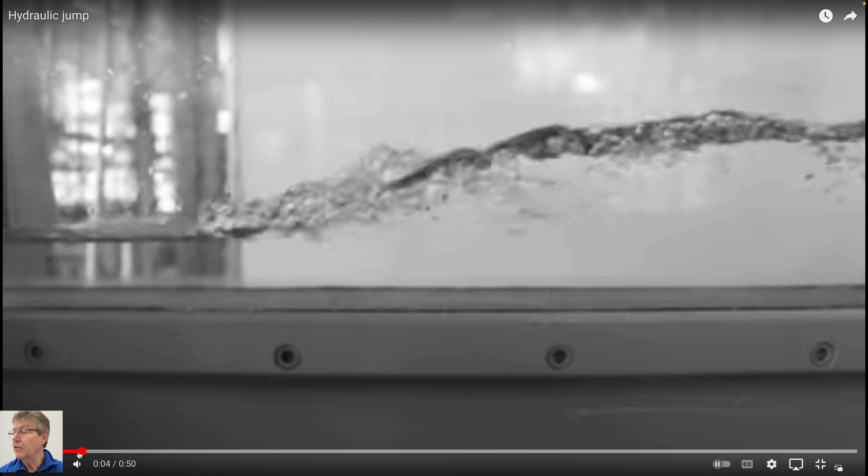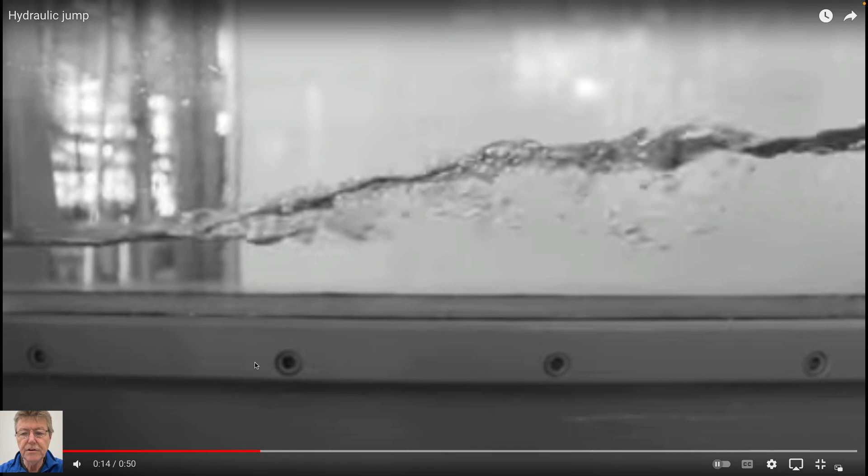You could imagine this is an elevated flow upstream, left of this plume. The interesting thing is it's not a confined flow within a pipe, so it can rearrange its cross-section to be either a fast, very shallow flow on the left-hand side, or a slower, deeper flow on the right-hand side, because a section across it anywhere has to have the same volumetric flow rate. This free surface allows it to rearrange itself in some way, and that's the essence of open channel flows.

The interesting thing about these, as we've made this point before, is if you're surfing in West Virginia, as they would say, many of the things we've talked about relate to balancing gravity with forces. For hailstones falling in thunderclouds, drag on the hailstone is balanced against gravity, which is the motive pulling it down.

It's not so different here in surfing West Virginia. Gravity is driving you down the face of the wave, but the water's flowing past you and providing some kind of friction on the bottom of the boat, perhaps viscous forces. It would be the same as snowboarding downhill, using gravity to go downhill, with friction acting against the base of your snowboard and air resistance against your body. So that's what we're dealing with, balancing those forces.

More interesting, I think, are some of these: the New River, not very far from here in West Virginia, big rivers in West Virginia, probably four hours' drive from here - the New River and the Gauley. It was interesting to see what people can do on these waves.

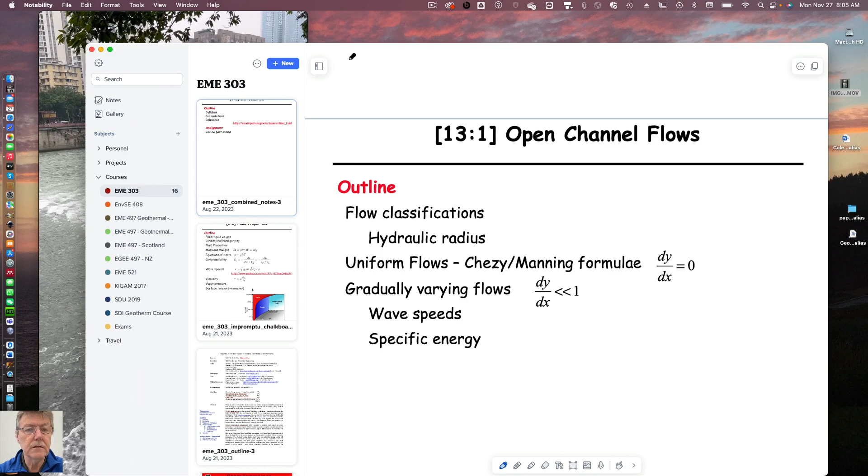So that goes. So I guess I can do that. So let me get this going. So that's our plan for today. I guess I was so excited I didn't turn my pad on.

So I thought that maybe we would recap some of the things we've talked about in the last couple of weeks and put everything in the same format. We'll talk about these classifications for flow, for open channel flows, where we have a free surface, and we'll find that they can be uniform flows, gradually varying flows, or rapidly varying flows. That's what that classification is.

We can define things in terms of hydraulic radius. We know that when we talked about Reynolds numbers, we talked about a characteristic length, which was a diameter.

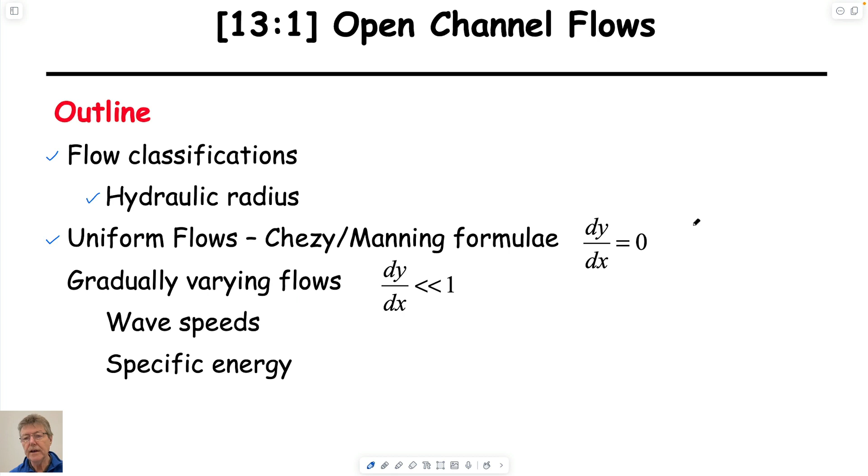We already defined the equivalent hydraulic diameter for non-circular section pipe flows. And probably today we'll finish talking about uniform flows, which is a simple demarcation to say that the depth of flow as you go from upstream to downstream doesn't change. Y is the depth of the flow, and we can accommodate that. So those are the things we'll talk about today.

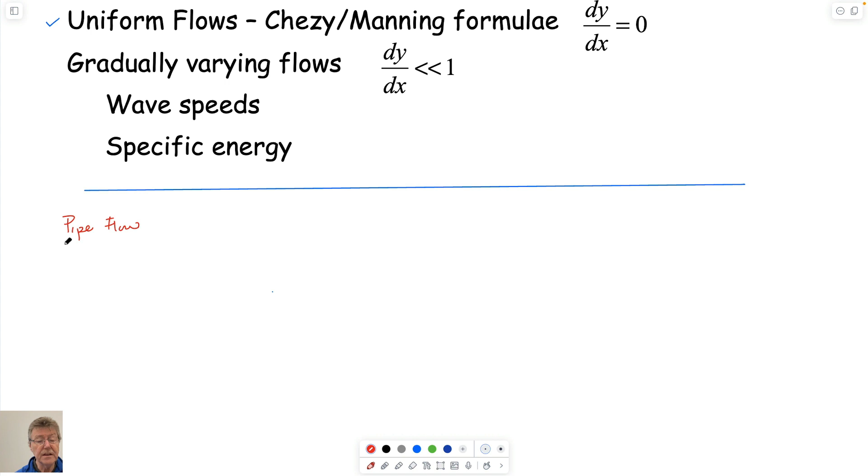But before we do that, let's recap where we are with all of this, in a nicer color. We talked about a bunch of flows. I think you've seen this before, but it cements the ideas of what we might talk about.

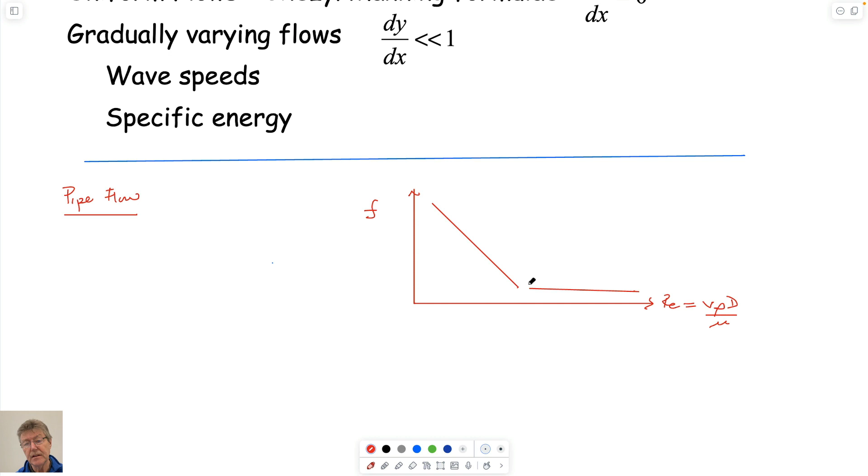In pipe flow, we talked about the Moody diagram, where we had Reynolds number, which involves velocity, density, a characteristic length, and viscosity. And we had what we called a friction factor. The characteristic behavior we saw looked something like what you messed around with.

I'll do this because it saves us time as we draw multiple diagrams on top of each other, which start looking the same, and which we will continue when we talk today. Again, Reynolds number - this was something like coefficient of drag. This was laminar flow, for circular pipes. The flow is internal, and it has some average velocity as you're going downstream.

If we write out Bernoulli and look at the terms that don't disappear for flow down a pipe, upstream to downstream, if the cross-sectional areas don't change, then the upstream and downstream velocities don't change. If it's a horizontal pipe, the elevation doesn't change. Then the pump losses equal the sum of the head losses in the system. Head losses we can define in a couple of different ways in terms of friction factor, length over diameter, and v squared over 2g.

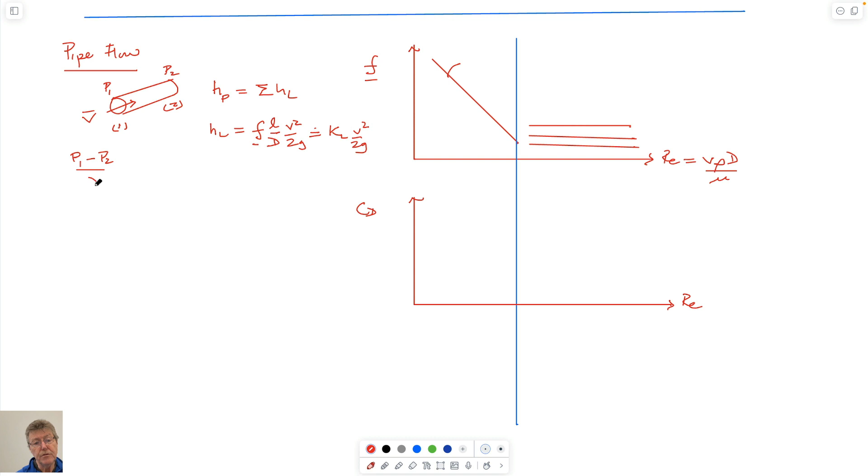Or equivalently, some kind of loss coefficient times v squared over 2g. Highlighting this because this is the case. If we look at the pressure upstream and downstream, we can write this as P1 minus P2, which is delta P divided by unit weight. If we don't have a pump in the system, it's just equal to the sum of head losses, which equals friction factor times length over diameter times v squared over 2g.

We've also talked about, in terms of dimensional analysis, geometric similitude - I can never remember whether the second one is dynamic or kinematic, I think it's kinematic. So this is geometry of the model equals geometry of the prototype, and this is Reynolds number of the model equals Reynolds number of the prototype. It's easier to draw on the open channel flow figure - that means if you look at the flow field...

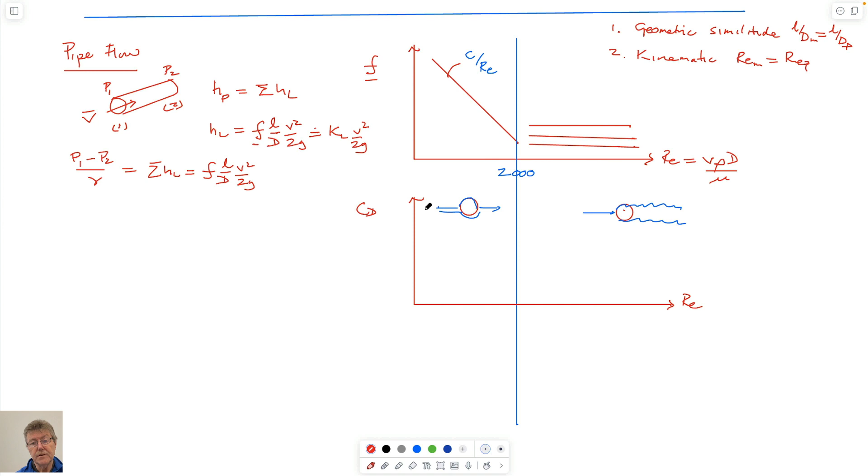Then laminar flow is this creeping flow - not that creeping - as opposed to being this. This is around 2000, something like that. This is some coefficient over Reynolds number, typically 64 for circular pipe. And if we're doing this, we have something like this - this is turbulent, and this is laminar.

Because this is a function of Reynolds number, we know flows on this side have CD or F proportional to 1 over viscosity - actually proportional to viscosity, isn't it, because it's 1 over Reynolds number, and Reynolds number is 1 over viscosity. So this is proportional to viscosity. And here, friction factor or the equivalent coefficient of drag are proportional to density. I suppose if there is such a symbol - not proportional to viscosity and not proportional to density. So the two regimes offer different kinds of behaviors.

We know this is also a function of increasing roughness, so epsilon over equivalent hydraulic diameter - this is a big roughness, and this is a small roughness. This means that when we use these to calculate things like velocities of flow, we end up with direct proportionality here and a v-squared proportionality here that we solve for. It happens in both cases, and we solve the equations slightly differently by balancing the pressure that's driving flow, in this case from upstream to downstream.

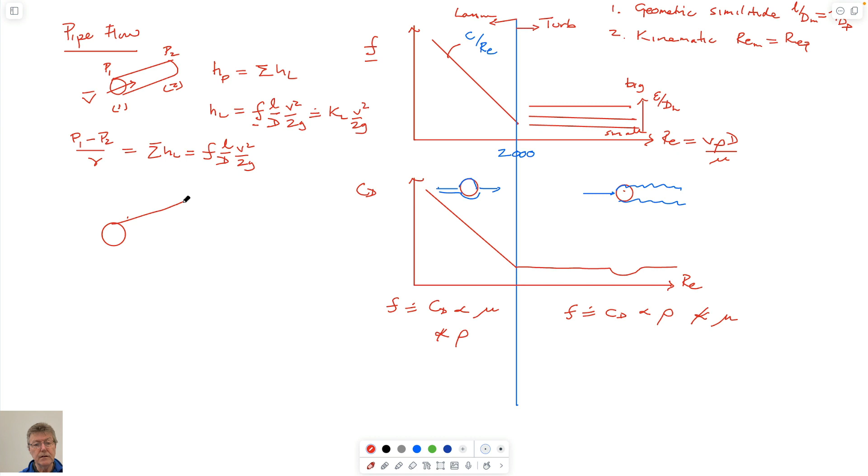I guess the analog in this system would be - we've drawn this before - that the flow that occurs goes around this.

And I don't need to perhaps belabor the point about that. So this is pressure upstream, pressure downstream, etc. And so what did we get? We got that coefficient of drag is equal to some drag force divided by half times rho times velocity squared times characteristic dimension squared, an area. And so this happens to be the frontal area. This happens to be the force that we have to apply to resist it.

And if we know what the value of D is, again, this is coefficient of drag divided by Reynolds number. I think 22, or is it 24? 24, I guess, for a sphere. And in this regime, it's proportional to viscosity. In this regime, it's proportional to density.

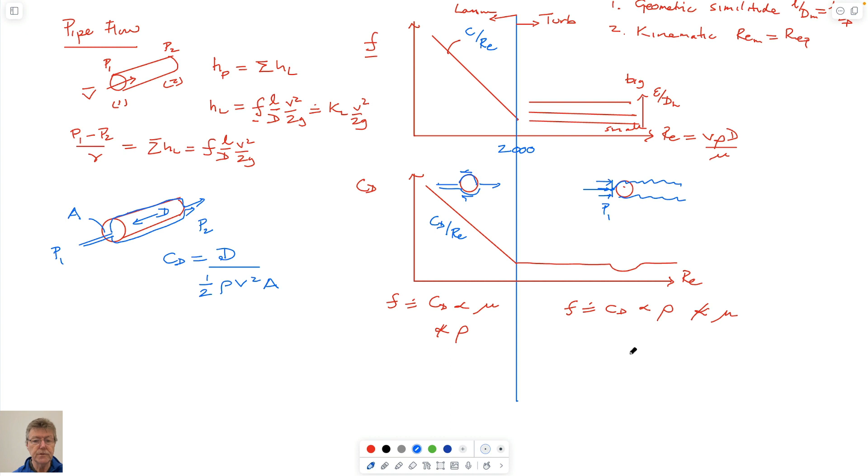And we explain that by the fact that it's not the drag that, so this is the shear force that goes around here, which is causing this drag in this particular case. And this is the frontal pressure that's applied here, that is the stagnation, so the pressure one is the stagnation pressure that develops here, which is why it's proportional to density rather than viscosity. So that's kind of where we are so far.

And so the next thing to chat about is open channel flows. And so not surprisingly, because I've done this, the figures turned out to be kind of the same. But we don't reference them the same way because we have the same behavior as before.

The characteristic that defines the drag is called the Manning coefficient, which is lowercase n. And the behavior would be similar.

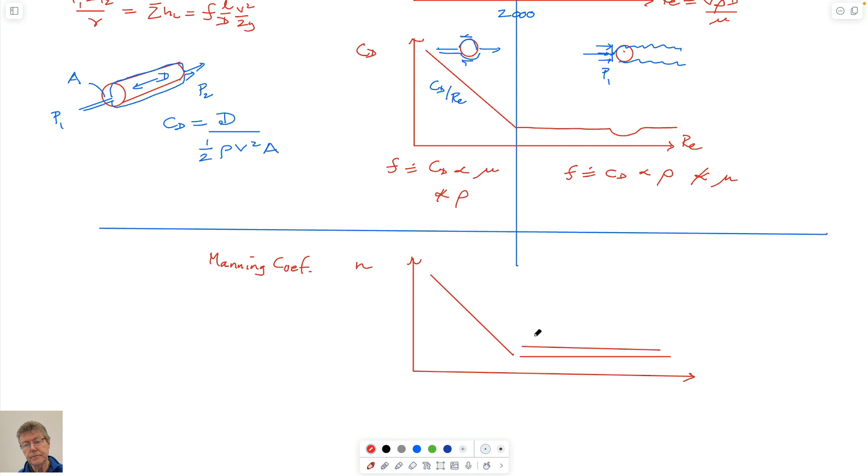So this is values of, if you like, channel roughness. So if you have a smooth channel, if you have a channel made of glass versus a channel made of concrete versus a channel made of weeds, then this would be rough and this would be smooth. And so this would be values of Manning coefficient, which go from small to large.

And as a continuation of this, this happens to be a Reynolds number, which is also defined in terms of a velocity, a density, and a hydraulic radius, and viscosity. And what we'll find is that this regime really doesn't exist for open channel flows because they're all turbulent.

And this is because of the fact that hydraulic radius and hydraulic diameter are related as 4 to 1, not 2 to 1. This ends up being a Reynolds number of 500. And the region which we always find ourselves is always this turbulent regime. So that's kind of where we're going with this.

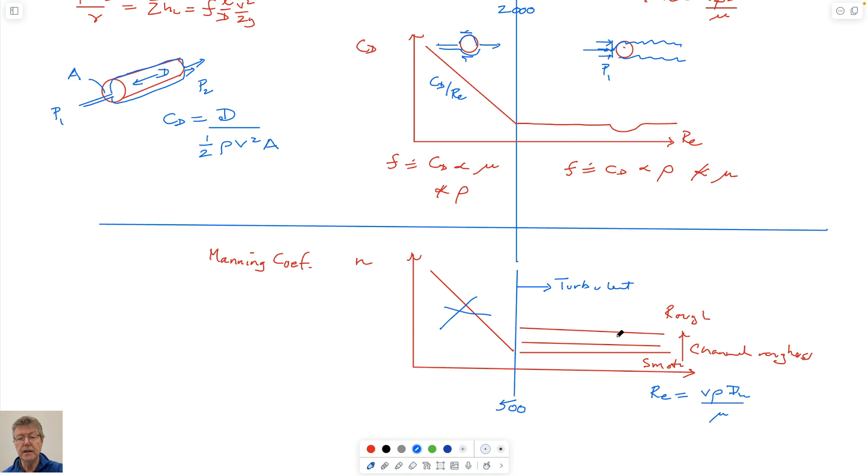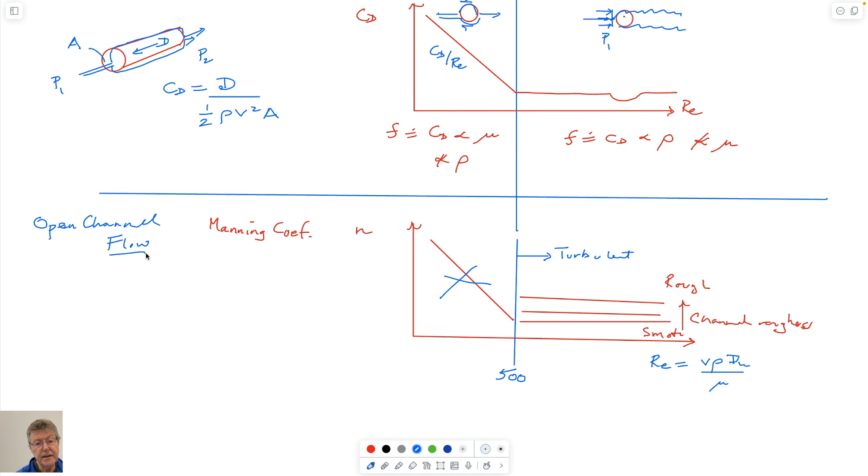versus flowing down a weedy channel, which is just the banks of a river in full spate, which is overbank, then we just change the value of this coefficient. But as we increase Reynolds number, it doesn't make any difference to where we're going. So that's kind of where we're going with this. So this is open channel flows. And as I say, perhaps of less relevance to your disciplines than the other two, but nonetheless important.

So a few orchestrated words, I guess, trying to make the point here. So this is exactly what we're talking about. So you could think about flow within a pipe, but it would be open channel flow if it wasn't completely filling the section. Because the one thing that we have that's a free parameter is the depth of flow.

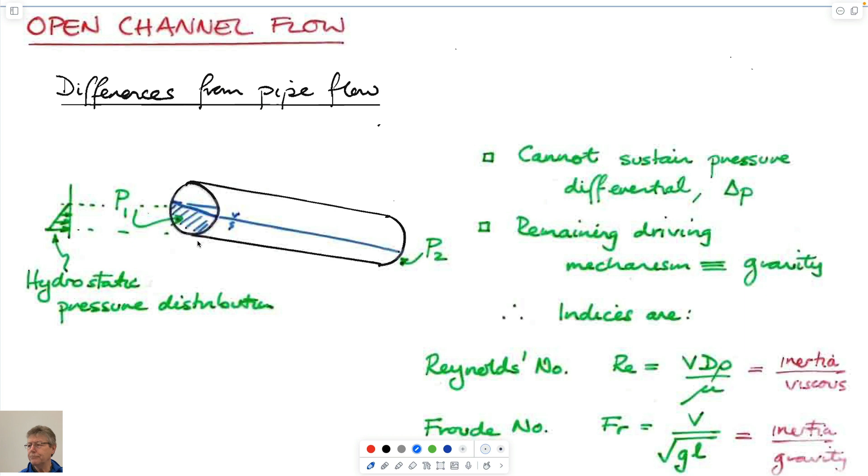We can't absolutely drive flow with pressure in this case, as perhaps you can see here. If you have an upstream pressure and a downstream pressure, it'll just tend to flow in the air above it because it's much less viscous, much more efficient, and you wouldn't be able to maintain the pressure differential by flowing the fluid. And so the fact that it only partly fills the section, even though it's in a pipe, means that it's an open channel flow rather than a pipe flow.

If you looked at the distribution of pressure below the surface, no surprise, when we looked at Bernoulli, you'd see that the pressure difference is just a linear one, just like going down in a static swimming pool.

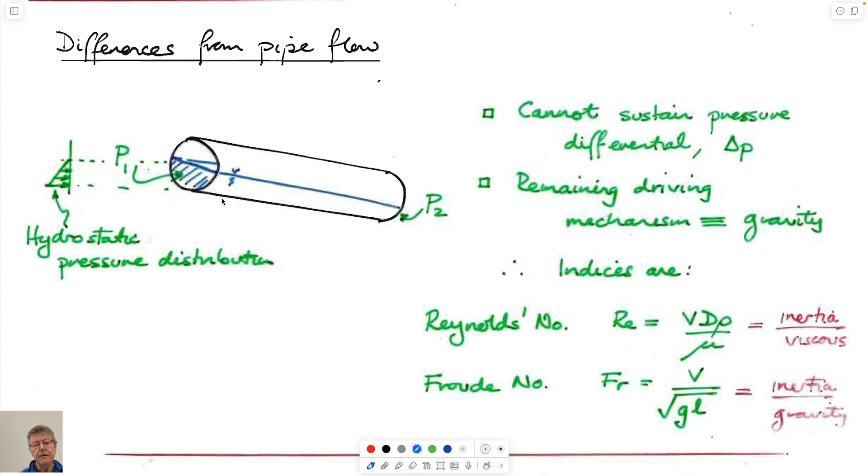I guess if it was going around a curve, it would have some different format to it, as we know from looking at Bernoulli and centrifugal flows, and going over a hump in a car, with the analog we talked about having water in a beaker. But if it's flowing and the section isn't changing, it would just be hydrostatic as it goes downstream.

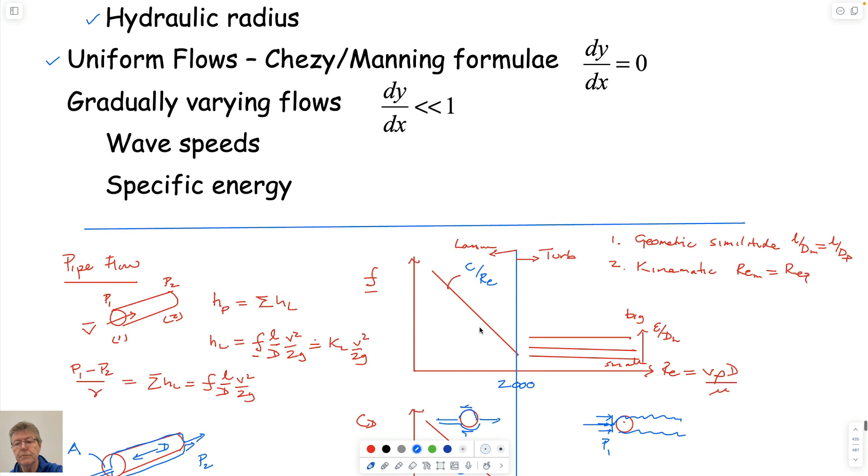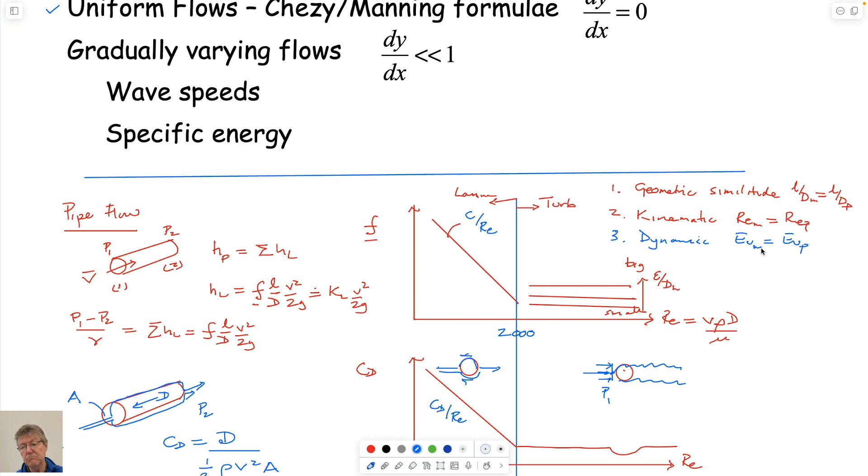If we want to have similitude, and I guess I didn't finish my thought before, the third would be dynamic similitude, and that is that the Euler numbers are equivalent between the prototype and the model. So those are the three things that also conform if we're looking at open channel flow.

I just didn't finish that thought. So we want to make sure that we're at the same Reynolds number. We say it doesn't matter so much because we're almost always turbulent. We haven't proved that yet, but we will in a moment.

The other thing that's important to us, which we haven't revisited since maybe our second class, is that we can look at the velocity of the celerity wave. The celerity wave is just the square root of gravity times the depth of flow. This is the rate at which a ripple travels, or a tsunami travels across an ocean basin, or a ripple comes from throwing a stone in a lake. It travels at this particular velocity.

And if the flow within the river is given by this term here, then when this number is equal to 1, the flow is traveling exactly at the velocity of the celerity wave. And that has implications for the regime, because if you think about it...

There's some information that you can imagine having to be transmitted from downstream. So we saw this hydraulic jump where we go from a shallow flow at high velocity to a less fast flow at a deeper velocity. How does it know what's going on downstream? Well, it can send information upstream, and that information will travel at the velocity of the celerity wave.

Something that's done quite often, or used to be—perhaps there are more sophisticated ways now—is in drilling. If you want to send information from monitoring behavior at the drill bit, you can send it as pressure pulses in the mud up to the surface. And of course that travels at the speed of sound in mud, not the celerity wave. But it's a way of being able to get information about what's going on at the bit, how hot the bit is, how much torque is being applied at the bit, and to get that up to the drill deck to inform what's going on.

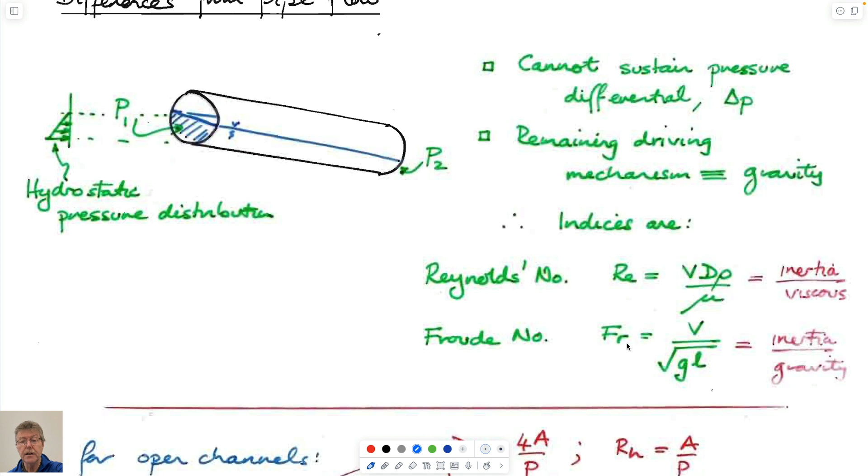So you could think of that as being a similar way of sending information by tapping it out on the surface of the water, almost like drums, sending information by drums.

We happen to define Reynolds number in terms of the diameter. And if we define the diameter in terms of the relationship between hydraulic radius and hydraulic diameter—I don't know quite why this is, but it is—then it's done as the hydraulic diameter is 4 times the hydraulic radius, which means that if you measure Reynolds number in terms of the hydraulic radius rather than diameter that I put up here...

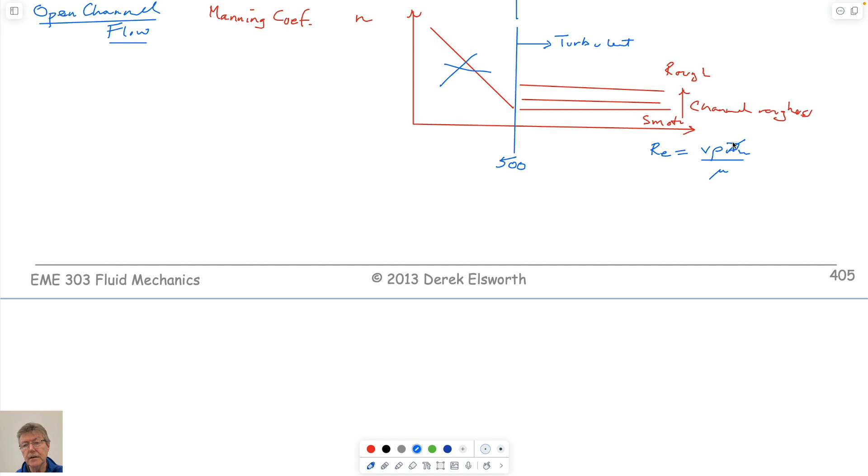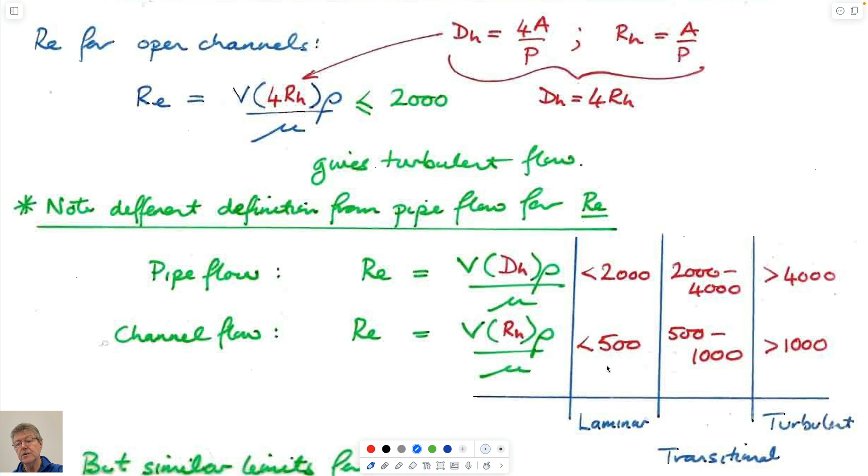So maybe this is hydraulic radius. Then the fact that this ends up being a 4, 2,000 divided by 4 is 500. And so if you look at open channel flows, this demarcation between laminar and turbulent occurs at this mark here. So that's the reason for that slightly different threshold.

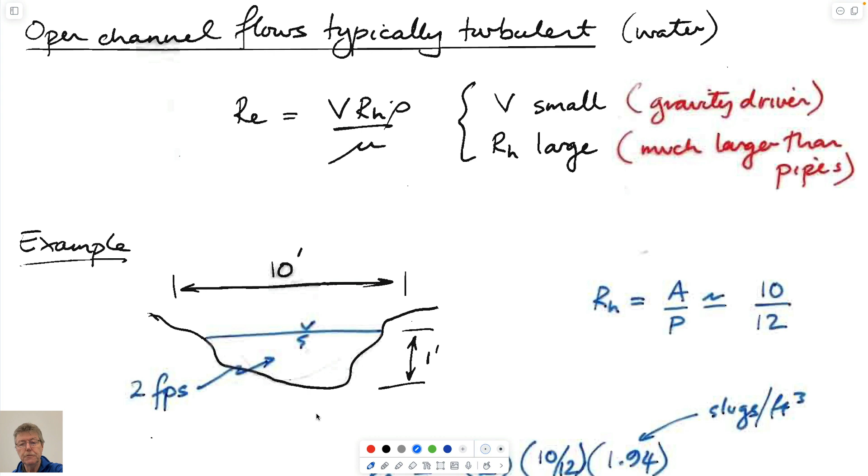But we're always to the right of that and don't have to worry about it. And you can prove it to yourself just by looking at whether we are above that threshold for any reasonable river. So if you take some numbers for a channel which is 10 feet wide, 2 feet a second, 1 foot deep—it's actually a ditch really, isn't it? A foot, it'd be barely up to your kneecaps if you're standing in that.

And you look at the Reynolds number for that as being equal to—the hydraulic radius is 10 over 12. So the hydraulic radius is equal to the area, which is 10 times 1, divided by the perimeter, wetted perimeter, which is 1 foot by 10 feet by 1 foot. So this is 10 feet, 1 foot, and 1 foot, which is this.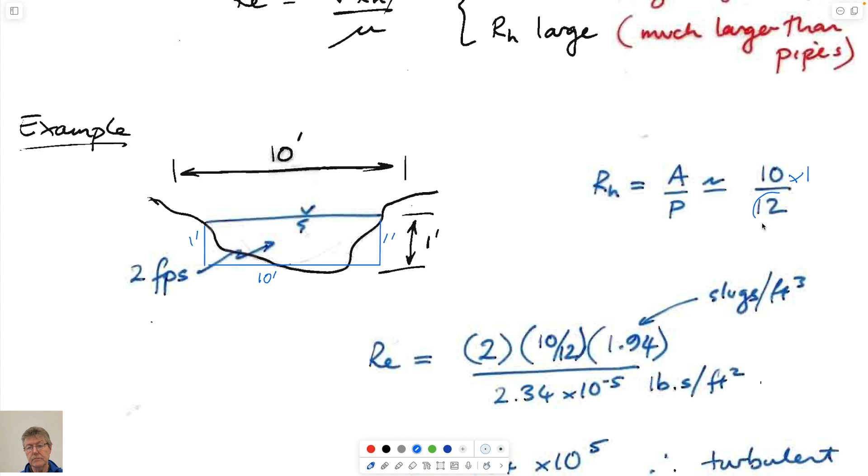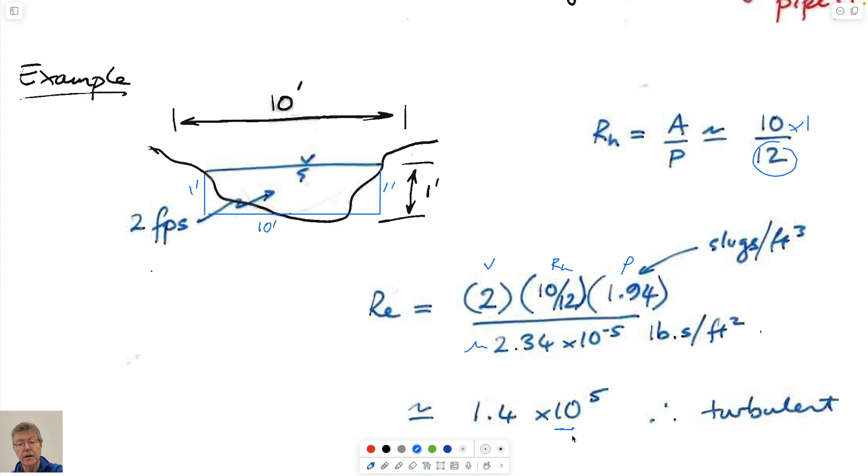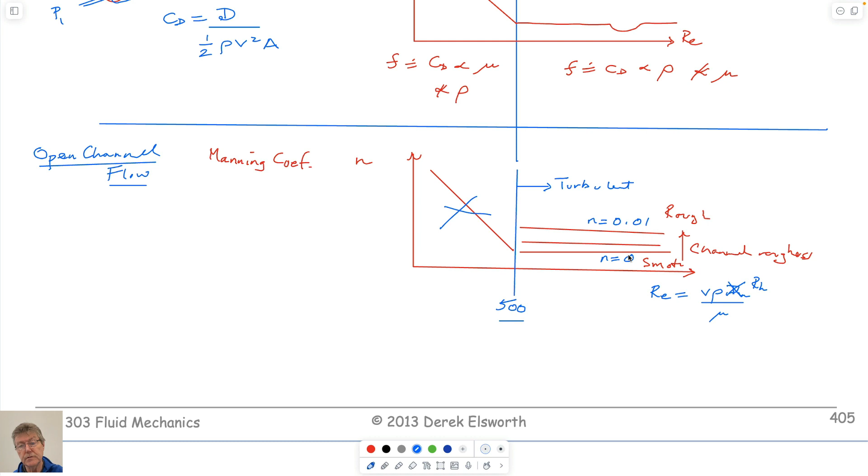So, classification. We said we'd classify things. These terms here refer to uniform flows, gradually varying flows, and rapidly varying flows. And I guess each of those, as I stated them, are in order of increasing deviation from being a uniform flow.

So a uniform flow is that as you're upstream, the depth of flow here compared to the depth of flow downstream doesn't change as it goes from upstream to downstream. Gradually varying flow means that it's slightly different, maybe deeper upstream than downstream. And a rapidly varying flow means that there's a big change between it going from upstream to downstream.

So that's the most uniform is the uniform flow. The next up from that is gradually changing, and then rapidly changing is more extreme as you go. And so by definition of that, if you state it mathematically, the change in depth as you go downstream in the x direction is that the depth doesn't change. Written mathematically, that's just what that is.

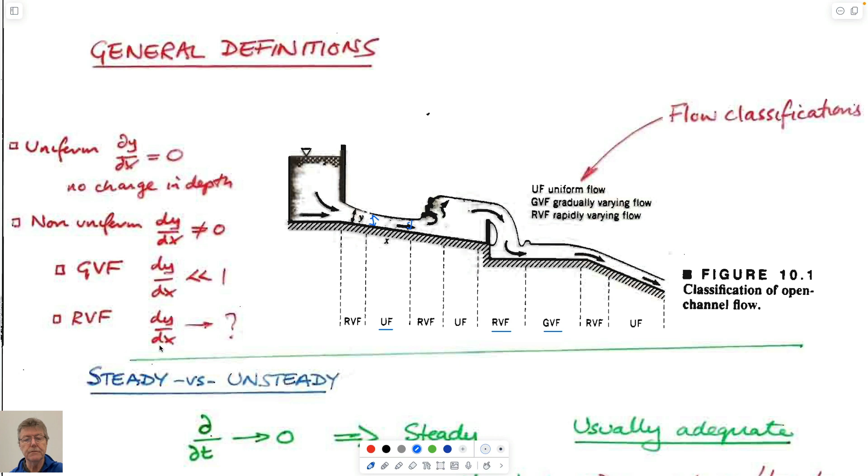A gradually varying flow, it's much less than 1, and a rapidly varying flow, it's different. So anyway, we'll deal with those in due course.

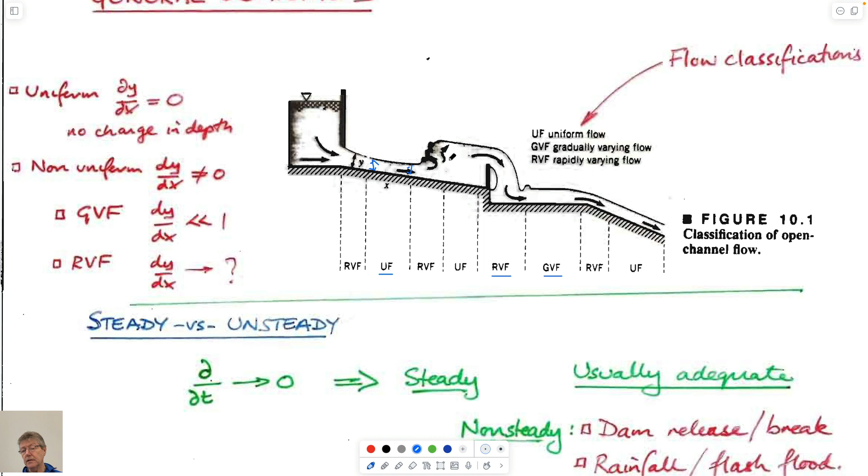Steady versus unsteady, we'll only deal with steady flows in our case. So each of these are steady flows. If you take a snapshot now, come back to this picture, take a snapshot 10 minutes later, this would be exactly the same profile with the same velocity distribution as you go downstream. It isn't the same as you travel along in a boat, as you see this, but it is for a static observer. So we're always looking at no change with time.

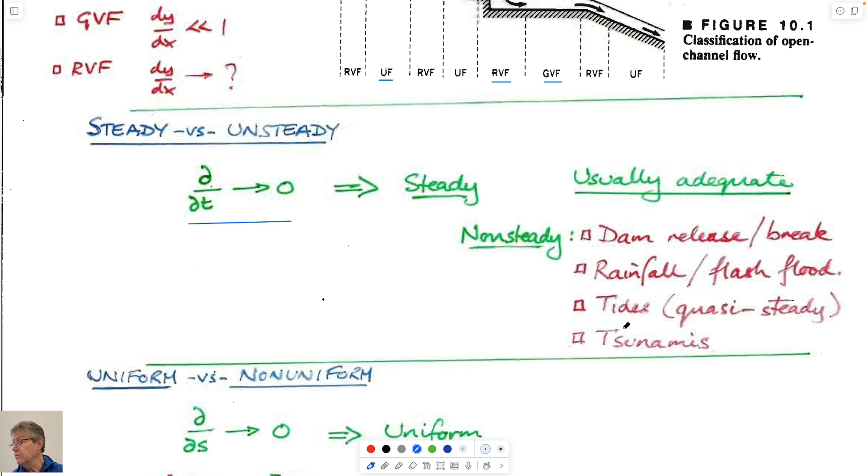And so examples of non-steady things: if you have a dam break on you, changing rainfall as a hydrograph, tidal bores in rivers would be different from that, and of course tsunamis are a transitory wave as well.

So what we'll do is we'll deal with uniform flows today, and we'll talk about gradually varying flows tomorrow, Wednesday. And so the definition of this and the difference between them is given by these.

The only motivation for flow is given by gravity. So it's the orientation or the inclination of the bed which provides that gravity. The slope of the bed is given by the change in z as a function of x. So in other words, I guess this would be this. I think we use L, but we can use this as well. So this is the motivation for flow.

And for uniform flow, what we would presume is that since the upstream depth and the downstream depth, you could think of them being perpendicular to this bed, or you could think of them being vertical, the fact is that this inclination is so shallow that both of them are basically the same. You don't have to worry about whether it's normal to the bed or not. But if the depth upstream and downstream are the same, then the slope of this surface, of the water surface, has to be the same as this.

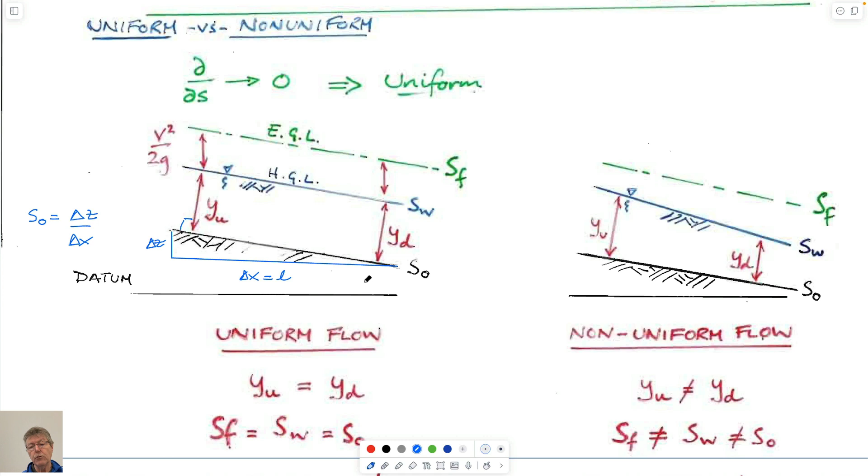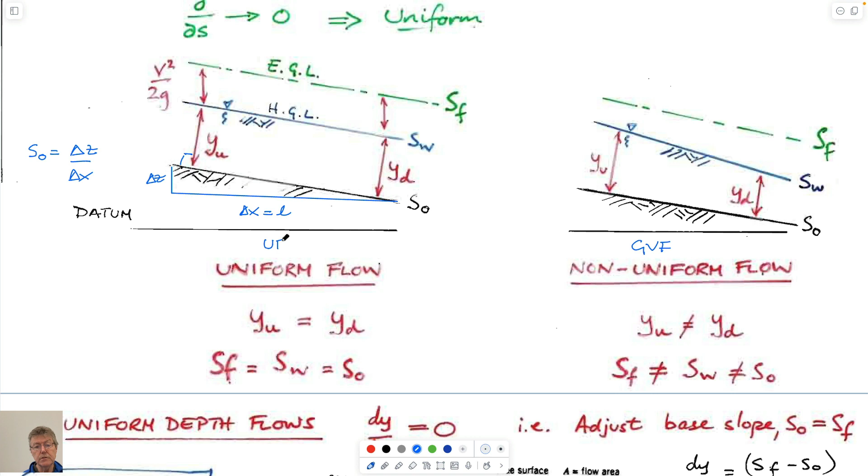If we look at non-uniform flows, which would be gradually varying flows, and these would be uniform flows, then you can see that we violate that. There's no requirement that the depth stays the same as you go downstream. And so there's no requirement that the slope of the water surface is the same as the bed slope.

So these hold that for the slopes of the water surface, the energy, and the bed have to be the same. Not so for gradually varying flows.

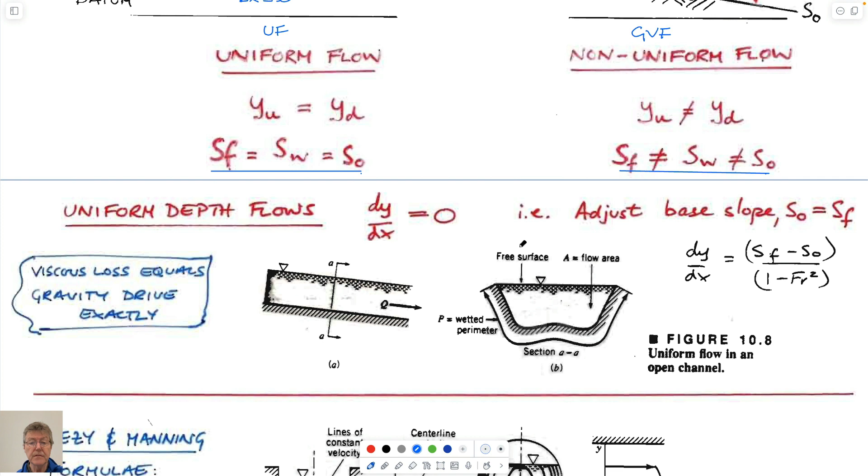I guess the other thing that we will assume is that there's no viscous loss, or the viscous loss is countered by the gravity drive. So the amount of potential energy we lose as we go downstream is exactly countered by the upstream. You could think of it as a viscous force, though it's not really a viscous force acting upstream, which exactly counters the change in potential as you go from this point here to a lower elevation here.

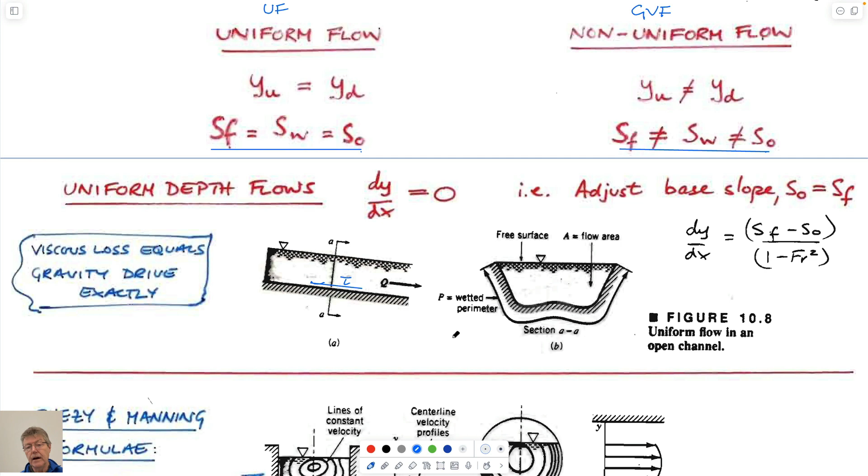And this is applied on the perimeter of the flow. The other thing we can think of is the cross-section of flow, if we draw this in perspective. So we have a perimeter which would look like this, and this length is the perimeter. So this is the area of flow, with a free surface on here.

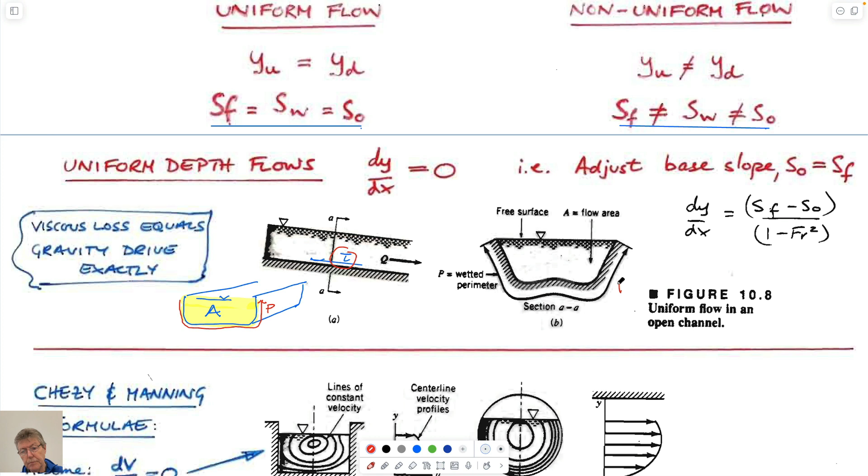And along this perimeter, this shear stress is applied, and it resists this flow. This shear stress is applied all the way across this perimeter, and so the wetted perimeter is what is important to us, shown by this contour here. This is the same as our P, and the A is within here.

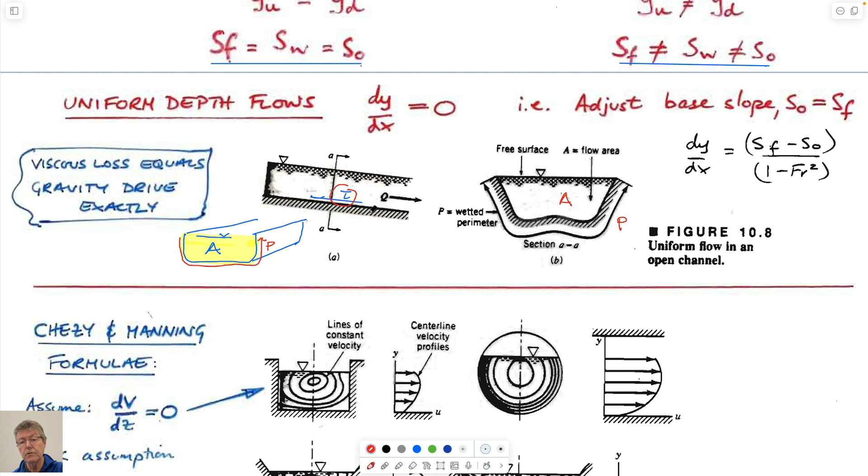And we also make some assumptions about this behavior - don't worry about this equation for now. So the balance between shear stress and gravity is what controls the rate at which it will flow downstream. A bit like the balance between drag on a skydiver and gravity, the person's weight pulling them downward.

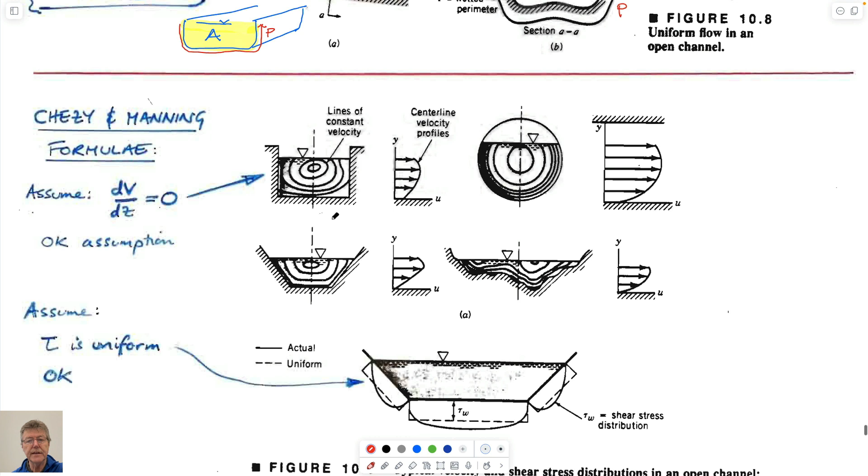The other assumption that we'll make is that the flow across the section is kind of uniform. We did this for pipe flow, so if we think about this average flow here, given by the area under this curve, we can rewrite it as an equivalent velocity, which would look like this if I drew it out.

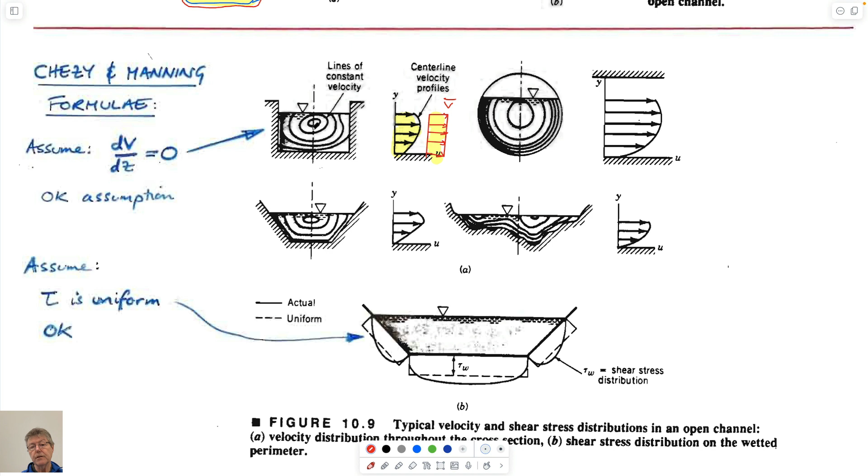So we're just retreading it. The area that we had under it covered in yellow here would be exactly the same as the area under this curve. That's all we're saying. So we have some kind of average velocity, which we'll call V bar, same as the average velocity we talk about in pipe flow. We make exactly the same assumption. You could imagine that if you have shear stresses acting at the edge of this, the flow in the middle of the pipe or channel would be fastest.

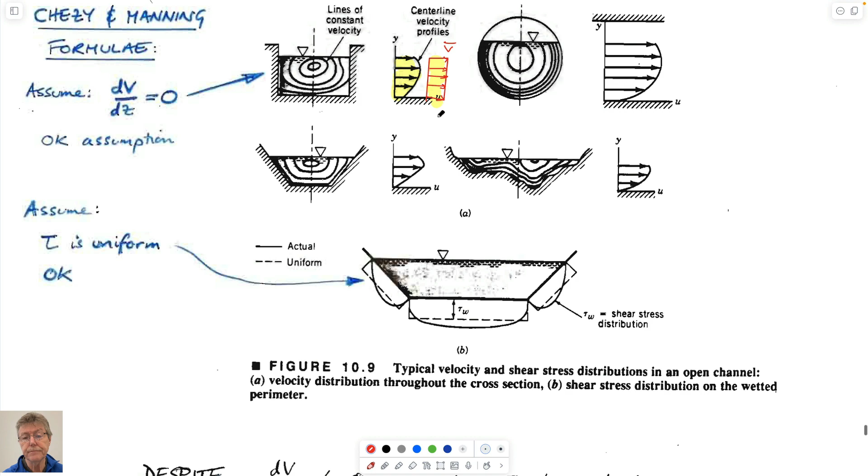So those effects do actually exist in channels, but we choose to ignore them because they're not huge effects, and we can get away with ignoring it. And so here's the math that we need to do to be able to deal with this. So this is for uniform flows.

And so our idea here is to look at momentum balance. You'll remember many moons ago that we wrote F equals ma as this - this is conservation of momentum. The sum of forces in the x direction, this is a velocity in the x direction, this is just equal to F equals ma, nothing different from that.

And so this is a mass rate of flow, so there's a velocity in here and there's a velocity in here. You remember that v squared over 2g is really an acceleration term as you're going downstream, and that's what this is. This here, I think, is a mass flow rate.

This is a mass flow rate term here, and this is a velocity term between upstream and downstream. And of course, if we're making the proviso that the upstream velocity in this kind of free body diagram, we've isolated a block of water. We have the velocity upstream, not the pressure, but the velocity upstream and the velocity downstream. If they are both in Cartesian coordinates the same magnitudes, then they subtract from each other.

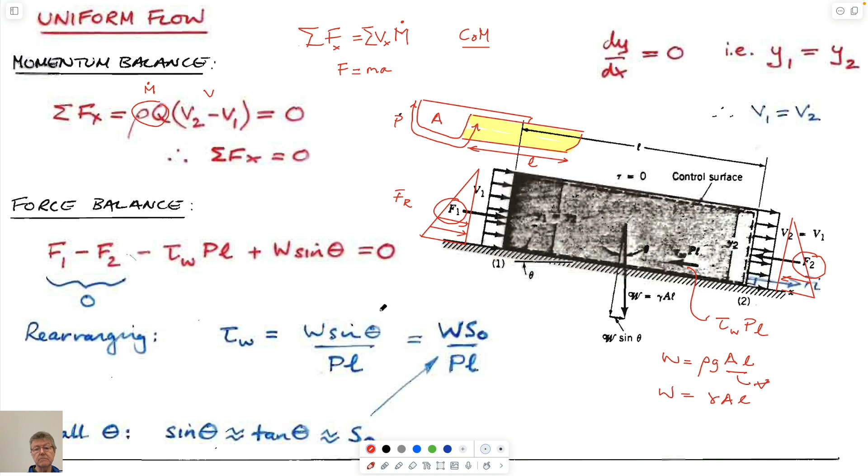And so we want the component of it which is acting opposite this shear stress, and that's if this bed is inclined at some small angle theta, then that's W sine theta, this component here. W cosine theta is the weight. And so these are just acting opposite to each other.

So a long explanation for a simple outcome, and that is that we end up with this expression here. So just rearranging this, noting the fact that, well, just rearranging it.

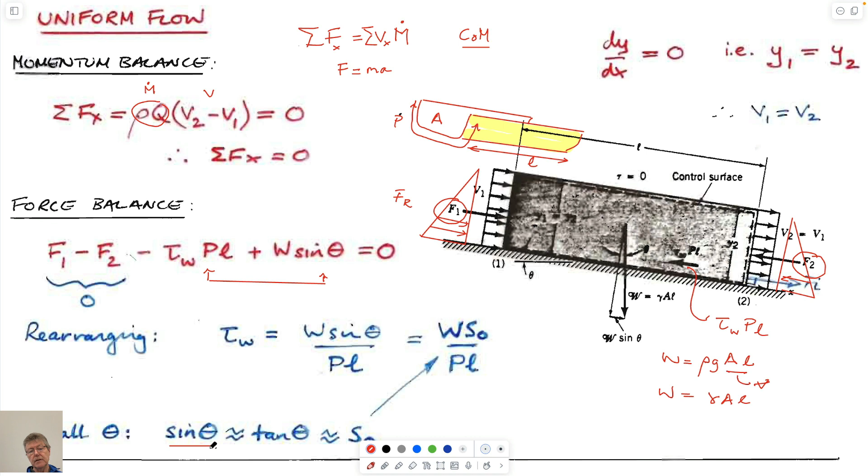I guess since we said that the inclination of these beds are quite shallow, then if that's the case, theta is small, and so the sine of the angle is pretty much the same as the tangent of the angle, which is the same as the angle itself.

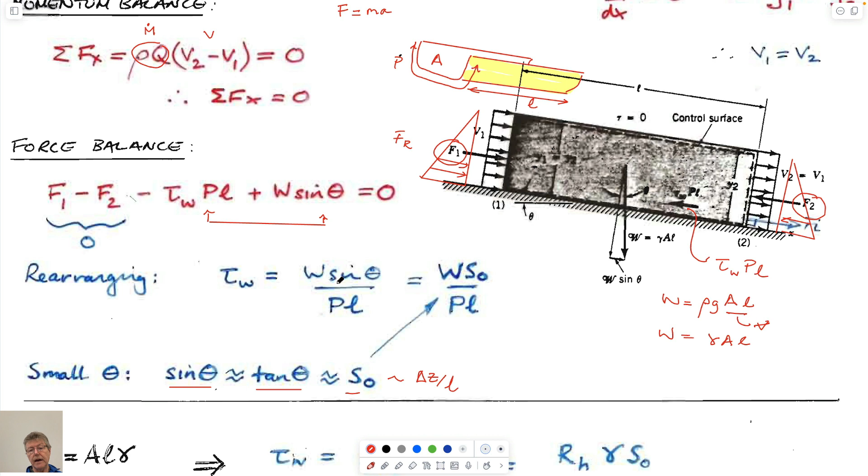So this is just equal to delta z over L, as we defined before. Delta z is just the height drop as you go along a unit length of this channel. And so we can substitute that into here, substitute this for this.

And so from that, this relationship here, we can make the substitutions for W, which we have here, and we end up with this.

And if we know that area over perimeter is some function of a hydraulic radius, we end up with the length over length. We end up with the unit weight times the gradient, just by making these two substitutions, that hydraulic radius is area over perimeter. Then we have this.

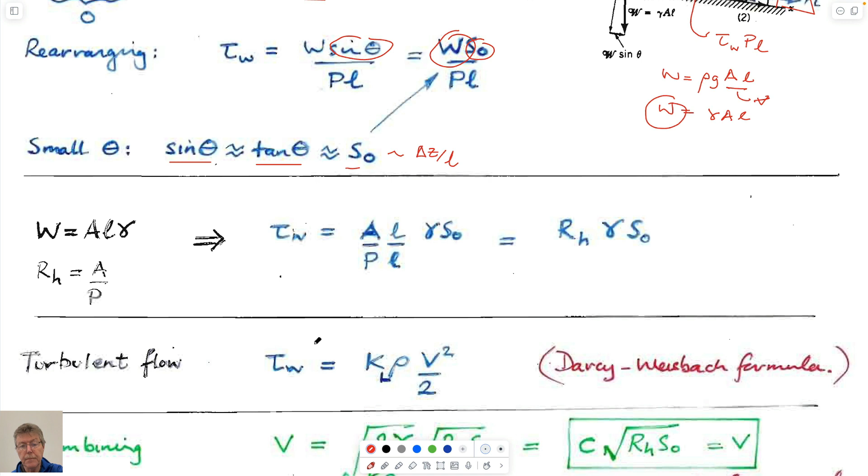And if we also know from what we talked about pipes, if we go back to when we were introducing this before, we made the case that the friction factor we can write as this Darcy-Weisbach coefficient. It's just for going around a bend in a pipe. It's a dimensionless number because it gives a length as a function of a length.

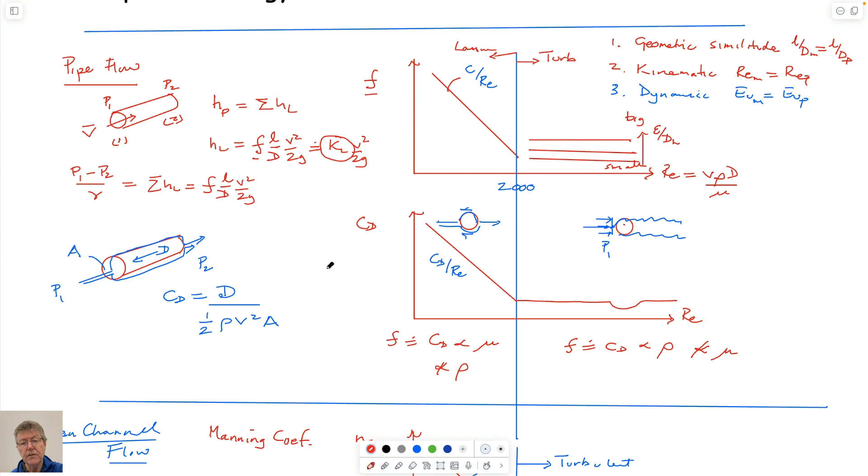And so that's kind of our equivalent of this loss here. And so we can write that loss as a function of this shear stress that acts on the base of this. And if we equate these two equations to each other,

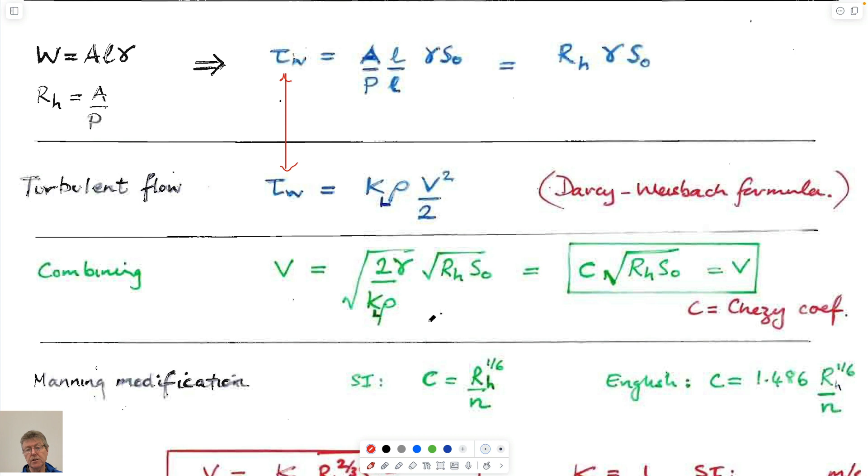we end up ending with a v squared term, and by dealing with that v squared term, we can just rearrange it, and we end up with this final relationship.

So you don't need to know the derivation, just the endpoint that we get to, and that is that we have a coefficient. This is density times gravity. This is density, so it's a function of gravity only.

This comes from the 2 in the v squared over 2g. This is some kind of loss coefficient, which says how much head loss we get downstream. If it's a big number, we're getting a lot of head loss as we go downstream. If it's a little number, we're getting little.

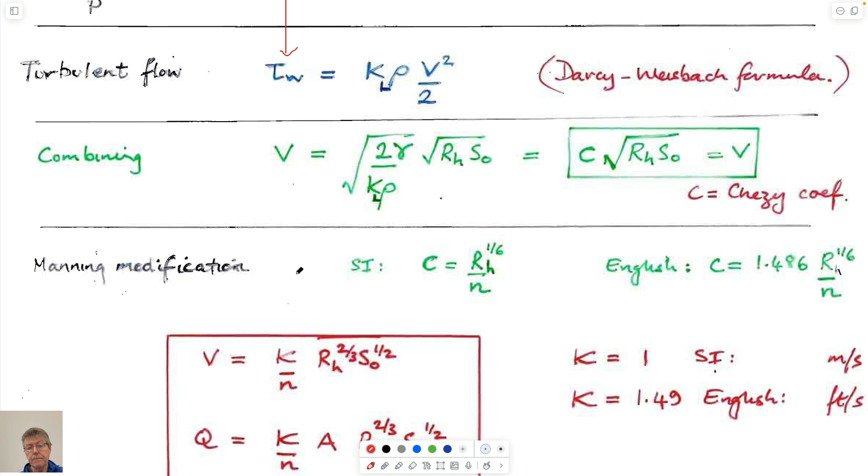And so we have this as a coefficient that goes outside, and it's a function of hydraulic radius times the gradient of our bed. Take the square root of it from this term here, and we end up with the velocity. And so this, if we then manipulate it, this coefficient we have to parameterize in some way. It doesn't really matter what it is. It turns out that this coefficient is related to the hydraulic radius to the power 1 over 6. And so if we have hydraulic radius to the power 1 over 2, or 3 over 6, when we combine them, we get something to the power 2 over 3.

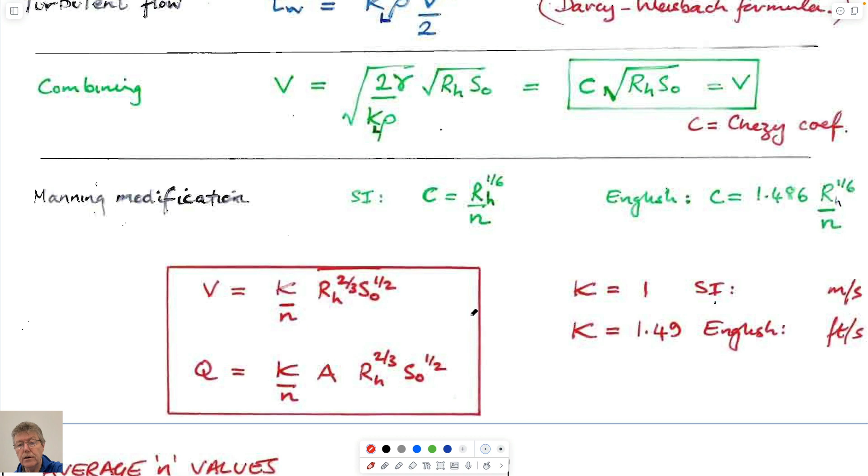3 over 6 plus 1 over 6 is 4 over 6, which is 2 over 3, which is where this comes from. And so all we need to know is that we end up with these two expressions, and they give us an average flow velocity down our channel, v bar, which is a function of...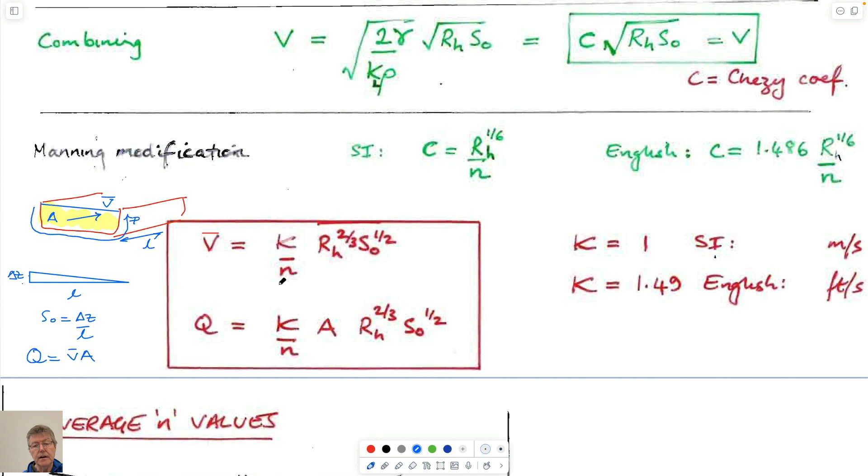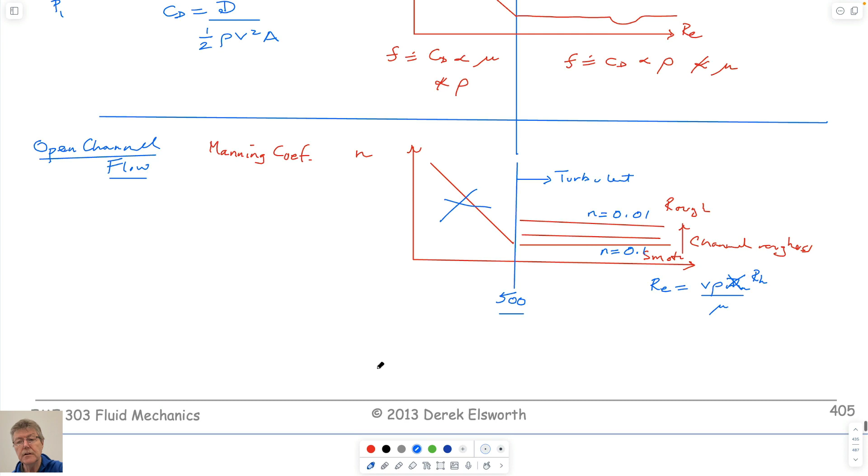n is this dimensionless coefficient, the Manning coefficient, which is really kind of the same as the friction factor. We never see it as a graph, but it would look like this if the graph was there, just like a friction factor is. But because we're always turbulent, we always see this just as a table, and so we'll talk about that.

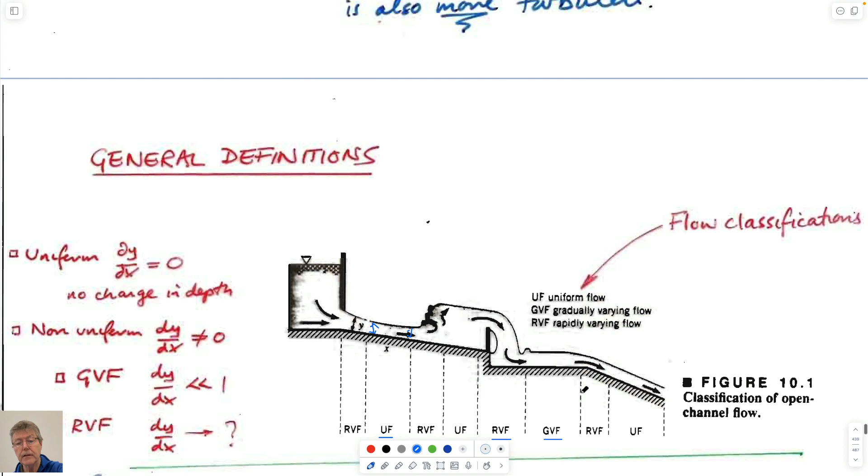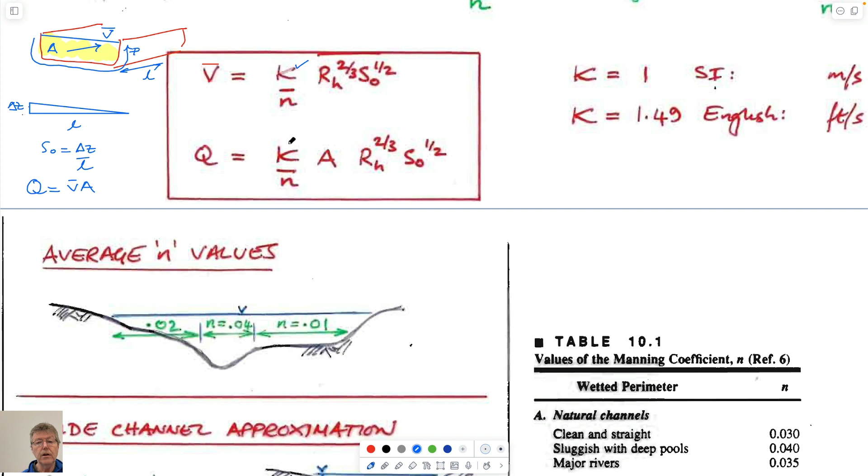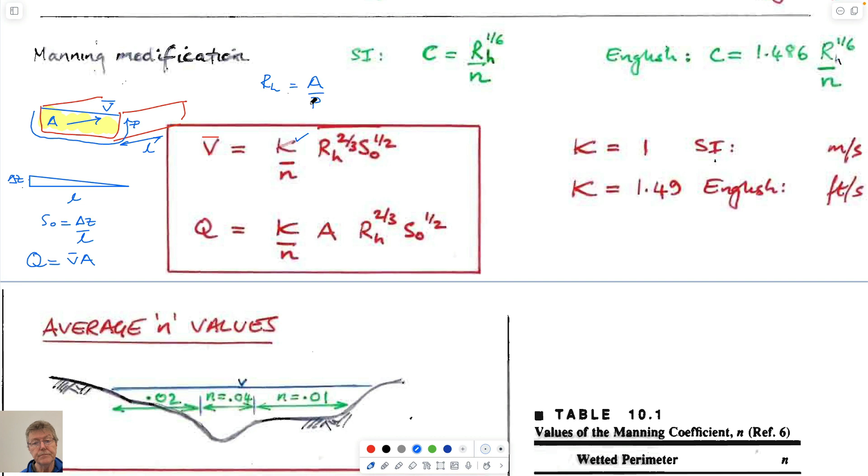And so if we want to solve any problem, we just use exactly that. So we know that this is either 1 or 1.49. We figure out what the hydraulic radius is for our system, and the hydraulic radius is just equal to the area of flow divided by the perimeter, which we have here, and the gradient, and everything else just falls out. So to solve problems, we can solve them in a variety of different ways.

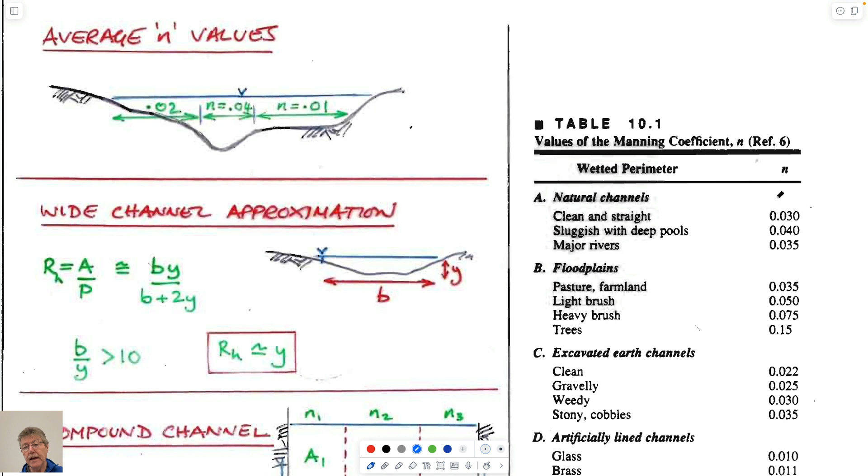The value of the Manning coefficient, lowercase n, changes from being a small number for smooth channels, to a bigger number for channels flowing through lots of trees. And so those would be the values of the friction factor that are stacked up on top of each other on this kind of Moody diagram. So depending on what the flow is through, we can get a value of n. We don't care about Reynolds number, because for all values we think we'll be turbulent.

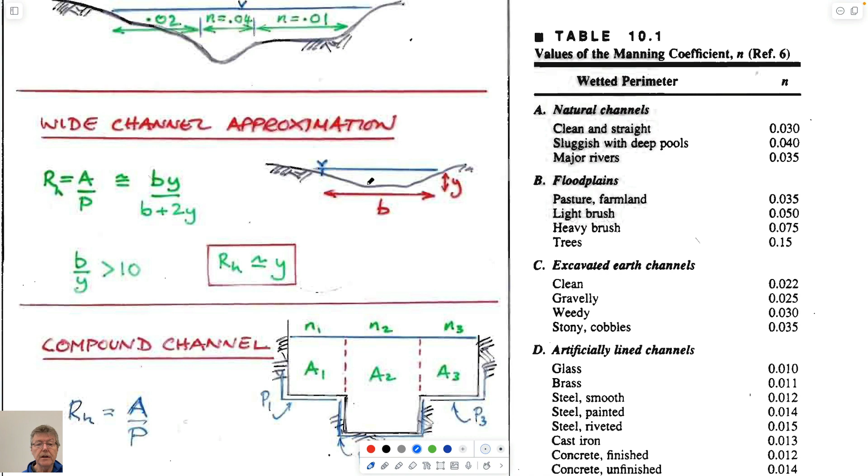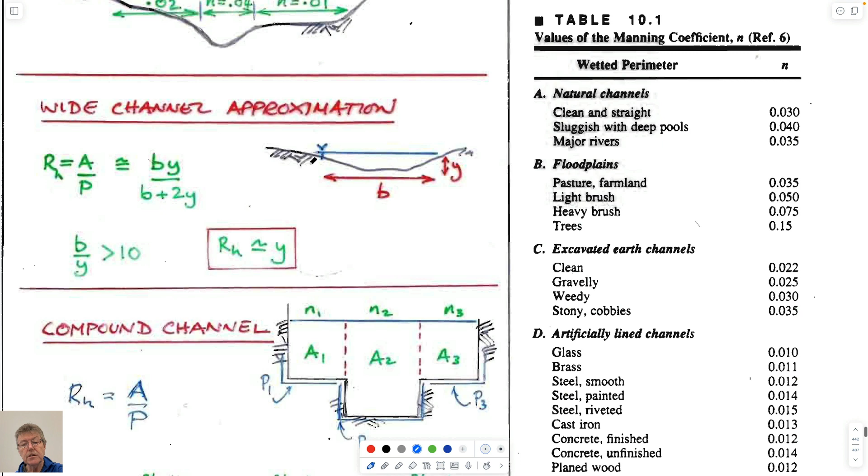If we're looking at flow within a wide channel, sometimes we can get away with using the approximation that the hydraulic radius is actually equal to the depth of the channel. We can show that to ourselves just by realizing that since hydraulic radius is the area over the perimeter, as the width gets very wide, the cross-sectional area essentially just becomes the width times the height. These little heights on the edge don't make any difference - the main drag is just due to the drag on the base of the bed. So if it's 10 times wider than the depth, you can get away with using this approximation.

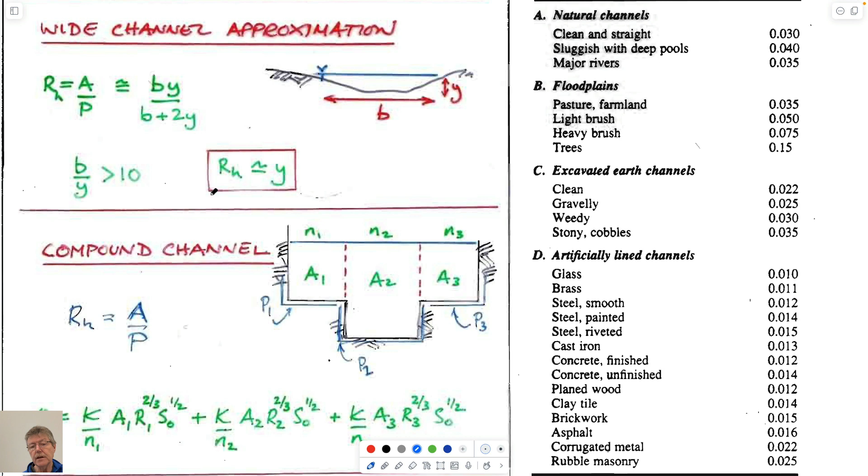If you have a channel which is non-uniform, you can get away with using it in segmented form. So you could calculate the flow rate through this whole channel just by dividing it up into the individual components. You'd get the flow rate as the flow rate in area 1, which would be Q1, and Q2, and Q3. But you have to remember that these could have different values of n, the Manning coefficient, if you wanted.

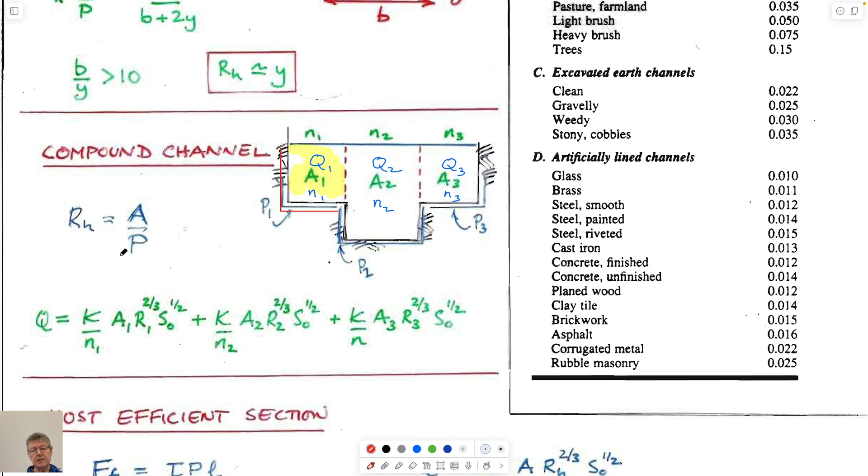The only thing you have to remember is that when calculating the hydraulic radius for this, it's the flow area given by this segmented portion here. So the flow area for 1 would be this full area here, but the perimeter is only the wetted perimeter. You have to be careful that the wetted perimeter is just this length here plus this length here. The reason is that this perimeter here is flowing down the stream at some velocity v1, but it's also going at some velocity v2 in the compartment next door to it. So this is the wetted perimeter, you should think of it that way.

So I think that probably makes sense. What else can we do with these when we finish it off? We won't get to an example, maybe we'll do that next time.

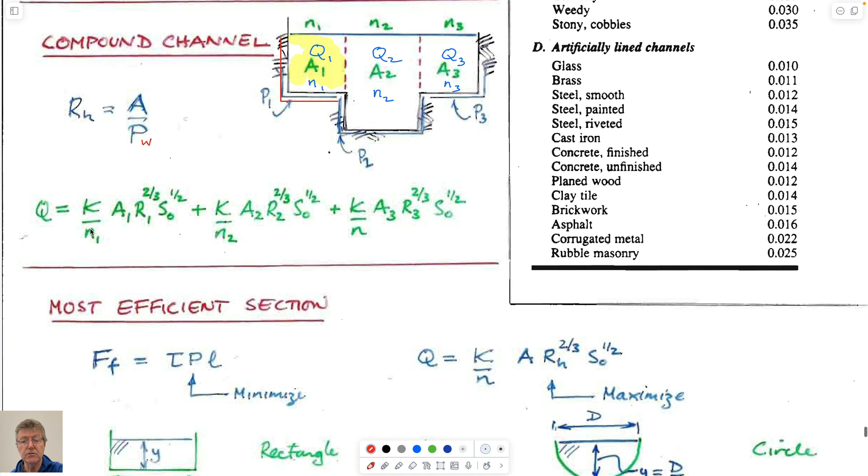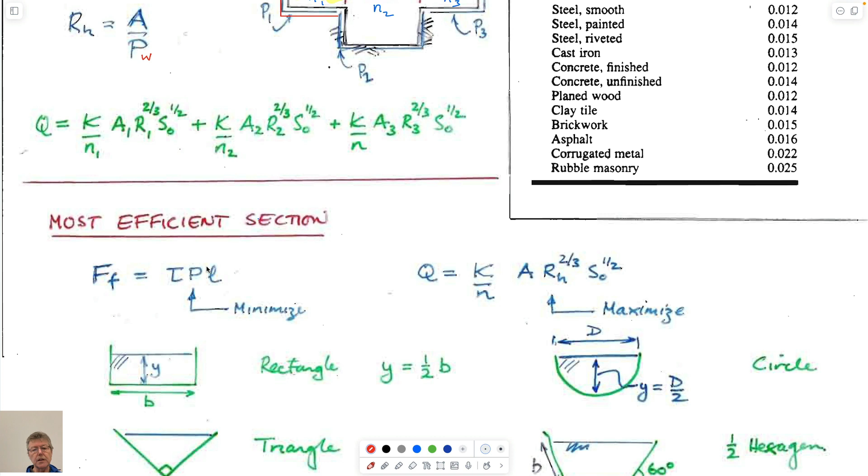The other thing we could do is think about the most efficient section, which would be the one with the minimum drag applied on it. The drag force we apply is the shear stress, which is a function of the velocity, the Manning coefficient, the wetted perimeter, and the length over which it occurs. This is a function of an invariant coefficient, the Manning coefficient, and the length over which it goes is the same in each case, so the only thing we can control is the wetted perimeter. So if you want to maximize flows within a section, you want to minimize the wetted perimeter.

We know that the hydraulic radius is equal to the area divided by the wetted perimeter. So if you're minimizing the perimeter, you're maximizing the hydraulic radius. And in this expression, you want to maximize the hydraulic radius.

If you look at rectangular sections, triangular sections, circular sections, or trapezoidal sections, you get the maximum flows when you maximize the hydraulic radius. That happens when, for a rectangular area, the depth is equal to half the width; for a triangular section, it has a right angle in it; for a circular section, it's half full, not quarter full, but half the diameter full; and for a hexagonal section, it's 60 degrees, where the slope length is exactly the same as the wetted base. So those are the most efficient sections to travel in.

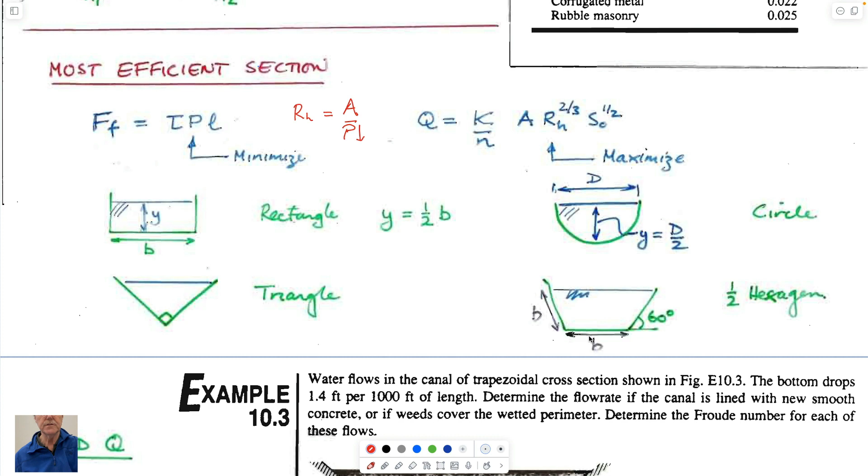We're right up at time, so maybe we'll save that for next time. We've tried to put this in context of pipe flow, external flows, and now open channel flows, which have an extra degree of freedom, so we have to figure out exactly what the height is, which is kind of a free parameter, and so we approach it slightly differently. But the basic mechanics are the same: something is driving the flow, which would be pressure in pipe flow, pressure in external flows, or gravity in the case of these other flows, and we're balancing that against the losses we get by drag on the base of the flow.

So these are the easiest ones, this is Manning. This is the question that is not on your final, but the question that might be on your final we'll talk about next time.